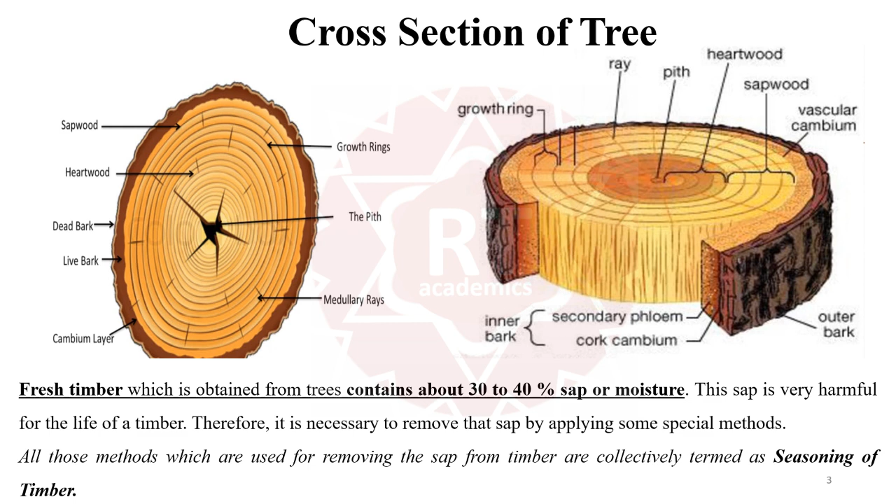Now we are going to see the different methods for seasoning of timber. The main types of seasoning are natural seasoning, which can be done with air or water, and artificial seasoning, which can be done by kiln, chemical, electric and boiling methods.

For natural seasoning, you can see these timber logs floating on a water body. Water seasoning is the process in which timber is immersed in flowing water, which helps to remove the sap present in the timber. It takes 2 to 4 weeks of time, after which the timber is allowed to dry. Well-seasoned timber is then ready to use.

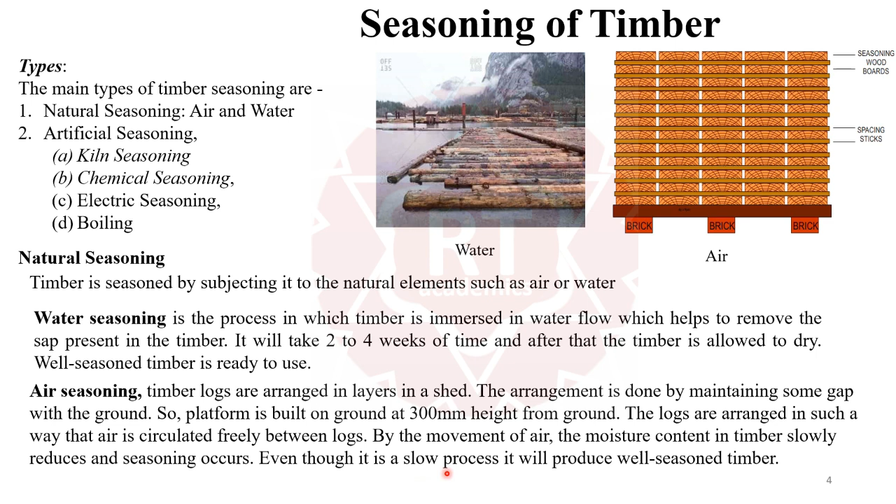Now the air seasoning process: timber logs are arranged in layers in a shed, maintaining some gap with the ground. A platform is built on the ground at 300 mm height. The logs are arranged so that air circulates freely between them. By the movement of air, the moisture content in timber slowly reduces and seasoning occurs. Even though it is a slow process, it produces well-seasoned timber.

Now we come to artificial seasoning. It can be done by chemical, electrical, kiln seasoning, or boiling methods. In chemical seasoning, timber is stored in a suitable salt solution for some time.

The salt solution used has the tendency to absorb water from the timber. Okay, so this is chemical seasoning. Now electrical seasoning. In this method, timber is subjected to high frequency alternating currents.

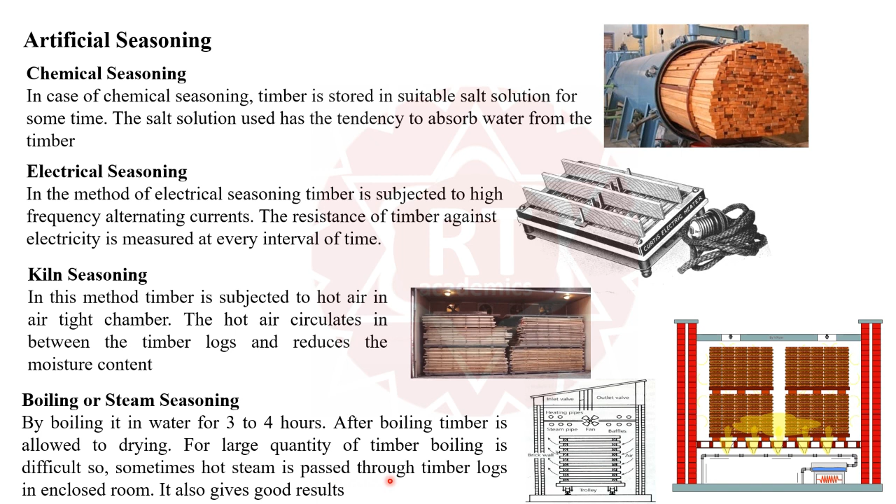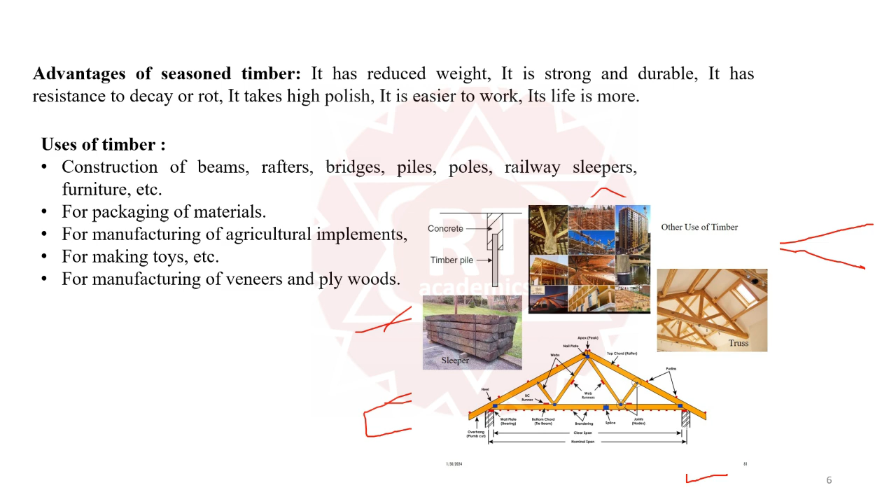Now advantages of seasoned timber. It has reduced weight. It is strong and durable. It has resistance to decay or rot. It takes high polish. It is easier to work. Its life is more. Uses of timber: in construction of beams, rafters, bridges, piles, poles, railway sleepers, for packaging of material, for manufacturing of agricultural implements, for making toys.

So defects in timber. A defect is an irregularity or abnormality occurring in or on wood, which is responsible for strength reduction and decay, lowering the durability, lowering of utility, poor appearance.

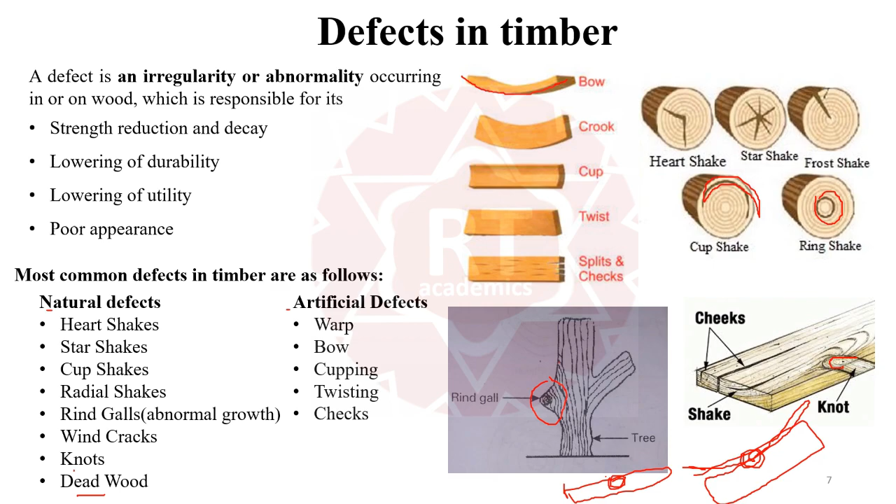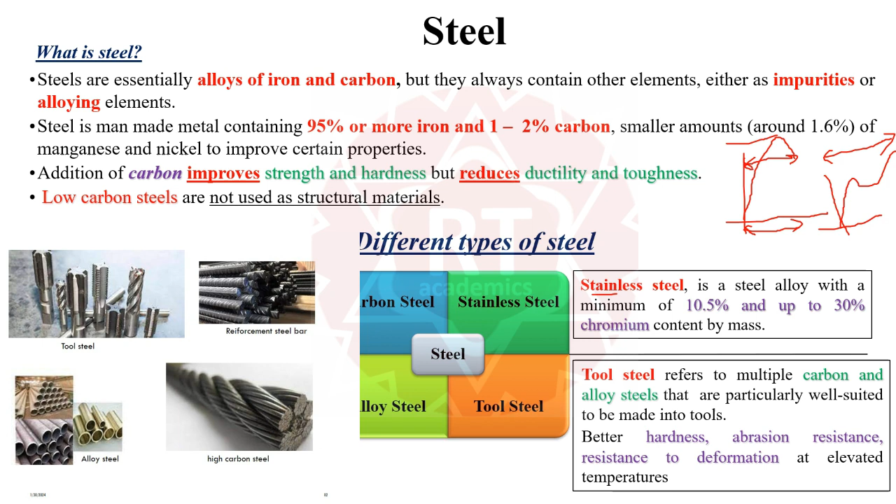Now tool steel is also there. It refers to multiple carbon and alloy steels that are particularly well suited to be made into tools. So it is better for hardness, abrasion resistance, and resistance to deformation at elevated temperature.

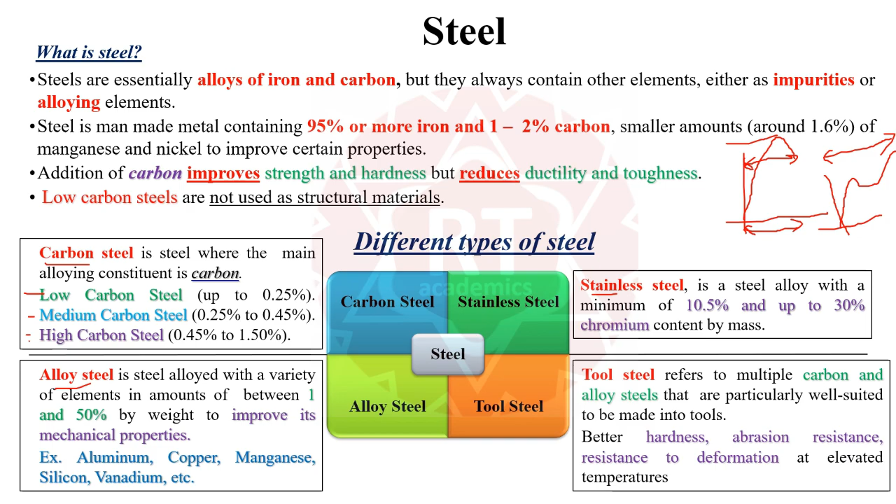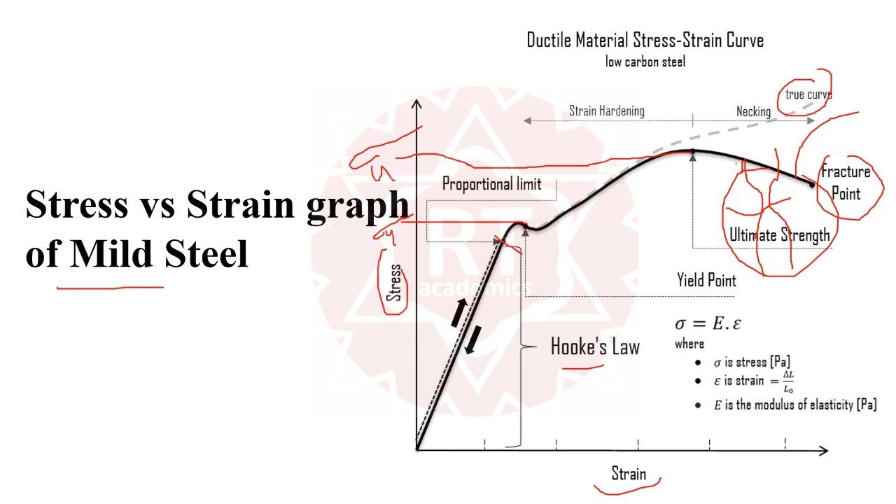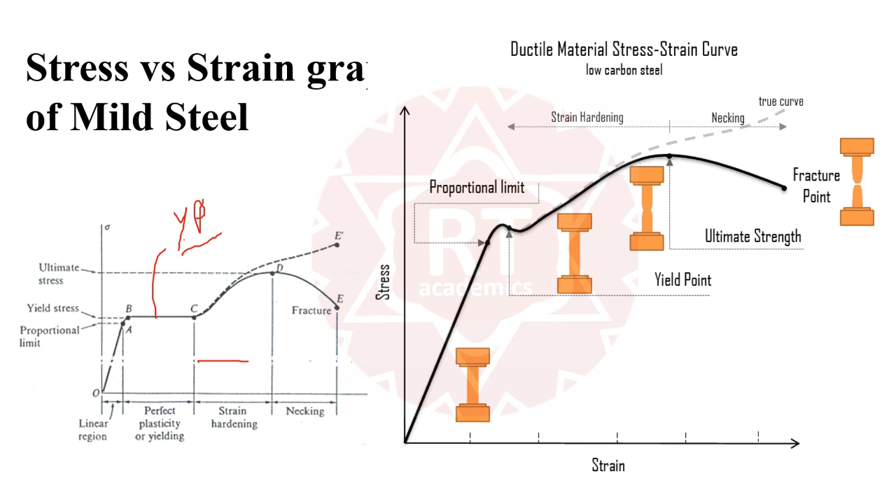And you can see Hooke's law is valid, sigma is stress, strain is change in length to the original length, and E is the modulus of elasticity in Pa. So these things have been discussed here. These are the different curves. Now in this curve you can see this is the yield plateau. Then the strain hardening region is there, necking region is there, yield stress, proportional limit, ultimate stress. So everything is there.

You can see the different shape of the shaft observed, and for this failure you can remember the cup and cone failure, cup and cone type failure.

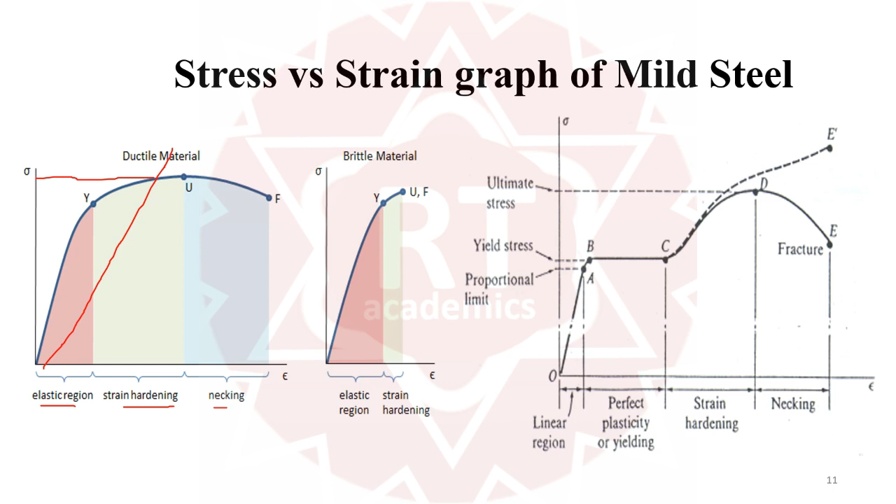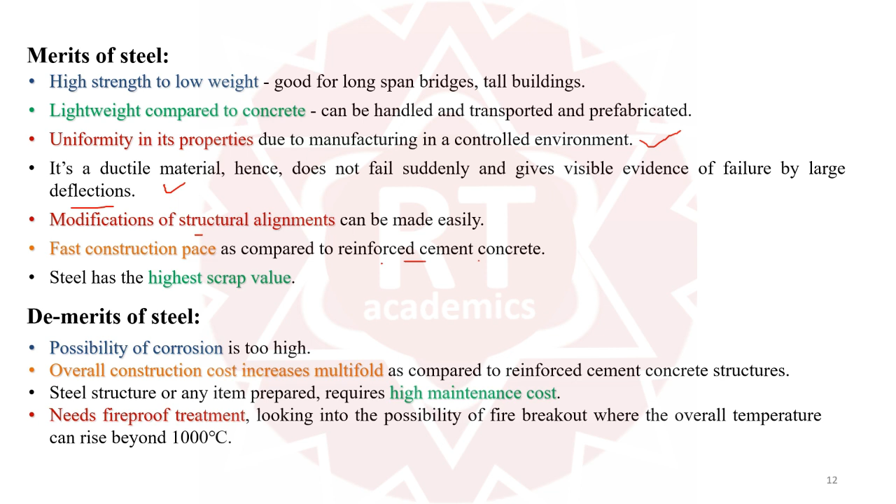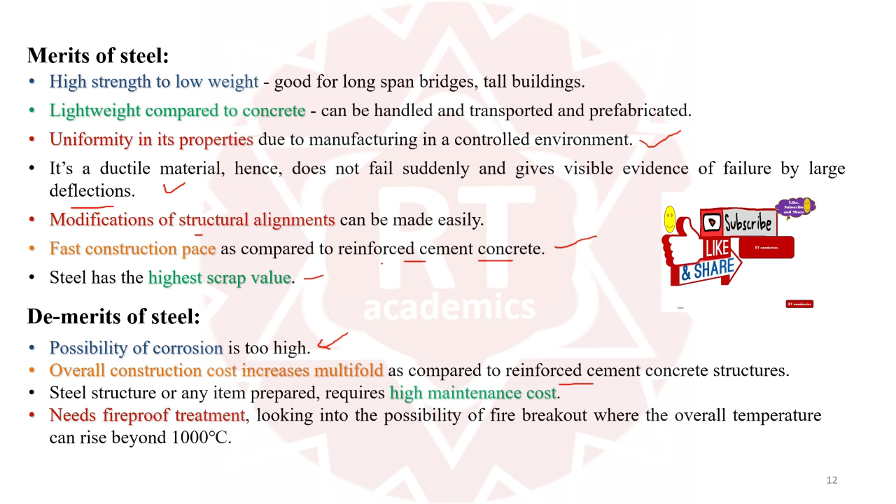Steel has the highest scrap value, that is the big advantage. Now demerits: possibility of corrosion is too high, but we make it corrosion resistant by many preservatives, red oxide, and other things. Overall construction cost increases multifold; it's quite costly compared to reinforced cement concrete. It requires high maintenance cost, and needs fireproof treatment, looking into the possibility of fire.